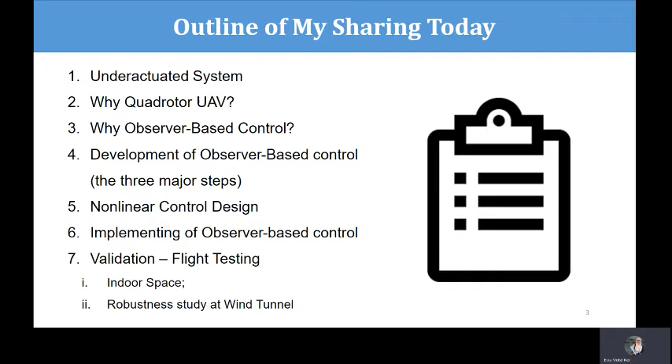Okay, so what is an under-actuated system? Under-actuated systems can be found in unmanned aerial vehicles, underwater vehicles, and also ground robotics. My focus is on the unmanned aerial vehicle, or UAV. In general, there are 2 types of flight: VTOL, which is vertical takeoff and landing, and fixed wing. In VTOL, we have, for example, the helicopter, ducted fan, and quadrotor.

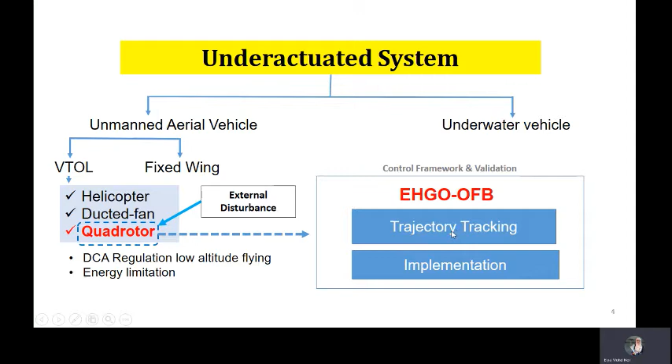In my study, I focus mainly on the quadrotor, because it is a good example of an under-actuated system and is of interest in the control community nowadays. The control framework and validation I'm proposing for the quadrotor is EHGO-OFB, meaning extended high gain observer with output feedback control, mainly focusing on trajectory tracking of the quadrotor during flight.

So why quadrotor UAV? There are 3 reasons. The first is its under-actuation property, which is of strong interest in the control community. The opposite is fully actuated. Fully actuated means you have one control input to control one output variable. But for under-actuated, you have a small number of control inputs to control a large number of output variables, so the control is challenging.

Apart from that, the potential application of quadrotor UAVs is very wide, for example search and rescue missions, remote sensing, construction, infrastructure inspection, and real-time road traffic monitoring. It has strong potential to replace humans in these missions, to be the first eyes for humans before sending them to do any job there.

But the challenge for the quadrotor UAV, or any UAV, is that it is small. It has a very limited payload, and it also has energy limitation, which means it can only fly for a certain time. The flight time is limited.

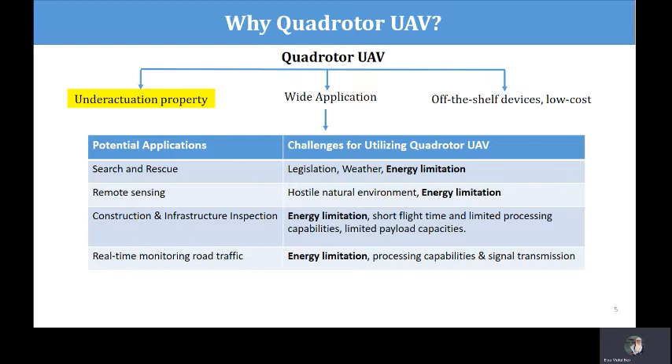So these are the challenges that I'm interested in and address in my research. Apart from that, quadrotor UAVs nowadays are available off the shelf. They can be assembled; we have them through commercially available devices. We can buy, assemble, and then set up whatever missions we want. There are so many things available off the shelf and it's low cost. So this is why I embarked on the quadrotor UAV study.

So why observer-based control for quadrotors? For a quadrotor UAV, as you see here, it flies. It is very small, and it needs to add monitoring sensors, whatever things help assist the human to check, evaluate, and monitor some areas, for example. But the payload for the quadrotor UAV is very limited. The more sensors you add to it, the more battery it will consume, and hence you're going to have a smaller flight time.

To have good control, we need all kinds of sensors. For example, to control the quadrotor in this mission, we may need position sensors, velocity sensors, so we can control the velocities and the positions, and also acceleration sensors. But in real practical applications of quadrotors, it is quite impossible to install all the velocity and acceleration sensors mainly to cater to the control algorithm. So this is why observer-based control comes in.

Observer-based control means that we utilize the existing sensors, for example, position sensors, and we estimate the position, the velocities, and also the acceleration, so that we are able to use the control algorithms to assist the quadrotor's trajectory tracking during flight. This is one example of a quadrotor flying over the open sea. It will consume a lot of energy to overcome the wind. So in quadrotor design we need something small and compact, and we try to find an embedded control algorithm that gives a smaller control effort.

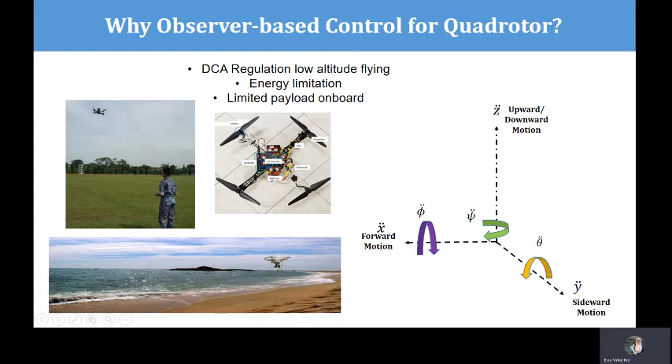So a little bit about the block diagram of the quadrotor. This block diagram focuses only on the under-actuated part of the quadrotor. The under-actuated part is actually in the forward and sideward motion. Here we see the control law and the actuators, which produce 4 signals: the thrust T, to lift up, take off, and land, and then tau roll, pitch, and yaw to separately control the tilting of each axis, the tilting in X, Y, and Z. So this is fully actuated.

This one is fully actuated, but under-actuation comes in because to move the quadrotor forward or sideward, we need to tell it to tilt the angle, and when it's tilted, it can move to the position we want. So the challenge in the under-actuated part is that to control position X and Y, the control torque has to tilt this angle, which then moves the other subsystem, the X and Y motion subsystem. So this is the control law that we are looking at.

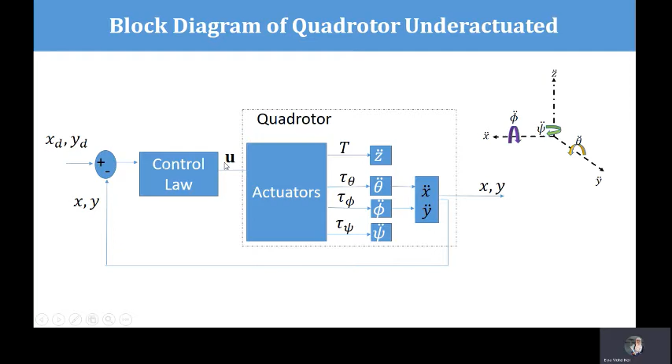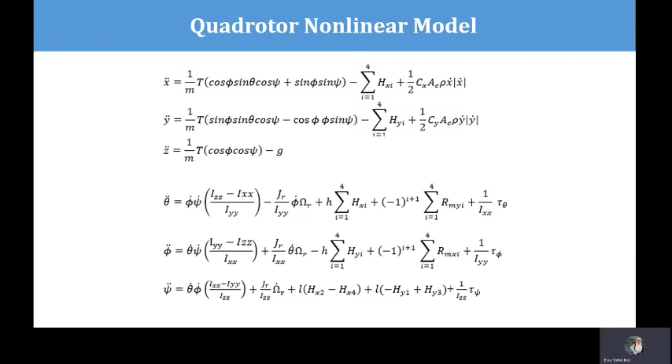So a little bit about the quadrotor nonlinear model. A quadrotor has 6 degrees of freedom, and this is the model. There's lots of literature where you can find the model. For example, I chose Bouabdallah, and there are others, for example from Italy, who have their models. Bouabdallah has a very simple model that was developed in 2004. So this is an example of a quadrotor nonlinear model.

Now we come to the main area here, which is the development of observer-based control for the quadrotor under-actuated system. In the development of this observer-based control, I would like to share that there are 3 main parts.

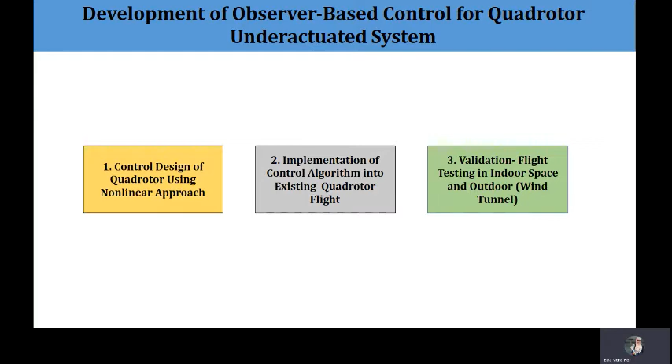So the first one is on the control design of quadrotor, which is using a nonlinear approach, the second is on implementing the control design into an existing quadrotor flight, and the third is on validating the control algorithm, which is flight testing in indoor space and outdoor. Okay, so let's go to the control design first.

So in the control design of quadrotor using a nonlinear approach, I would like to classify it into 3 major parts. The first one is we need to transform the quadrotor nonlinear model into under-actuated cascade normal form. So this is the under-actuated cascade normal form, where it has 2 subsystems, subsystem 1 and subsystem 2, which is cascaded.

It's cascaded, where the X4 here, the angular X4 here, will also be affecting subsystem 1, if you see S1 and S2. And also the control input is only at U here, which is at subsystem 2. Okay, so this is a general under-actuated cascade normal form.

So we look at this cascade normal form, and we look at the quadrotor, and we see how to map the variables that are related to each of these. So here, the input U is the torque at theta, the one we use to tilt the quadrotor to move forward, and also the torque at the roll, which we use to tilt the quadrotor to move sideward. That will be the control input U here.

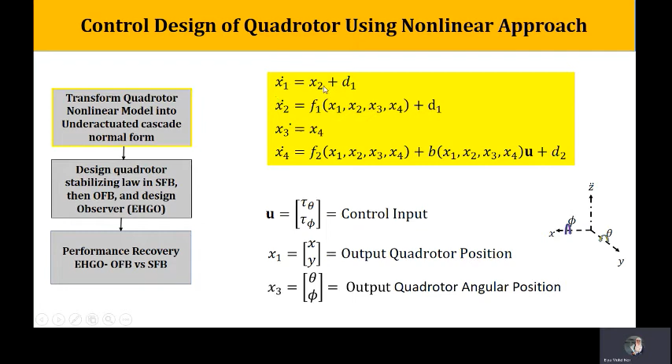Okay. So next is designing the quadrotor stabilizing law in state feedback, then output feedback, and designing the observer, which in my work I did using a extended high gain observer. So in the state feedback control, this is the control input.

Now, in state feedback control, there are so many nonlinear control approaches that we can use. For the state feedback design, there is backstepping, sliding mode control, and we can find them in the nonlinear control books authored by Professor Khalil. He has all the techniques.

But state feedback design is to develop the control algorithm, which is the theorem of the control. In order to implement the control, there are many areas that we need to look at. For example, if we have state feedback control, it means that all the variables x1, x2, x3, x4 are needed in the control algorithm. But in practical applications, for example a quadrotor, we may have limited sensors. We may only have sensors for x1 and x3, but x2 and x4 we don't have, right?

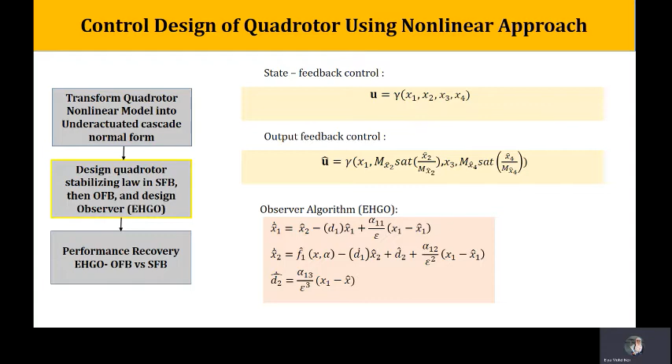So the last part of the control design framework is performance recovery of EHGO output feedback versus state feedback. In this part, if you are working on the development of the theory, for example designing the control algorithm in state feedback, you may need to do some proof of theorem. So here we are comparing performance recovery: how close our output feedback control algorithm is to the state feedback.

For example, for state 1, this is one example of a state response, where the position moves from 2 and is supposed to go to 0. This is the state feedback algorithm, assuming that our quadrotor has all the sensors needed by the control algorithm. This is the kind of response that we get, which is a small overshoot and a faster response.

But when we use output feedback, when we estimate certain sensors, this is the kind of output response that we get. As you can see here, in EHGO output feedback, the main parameter that we need to tune is the epsilon here.

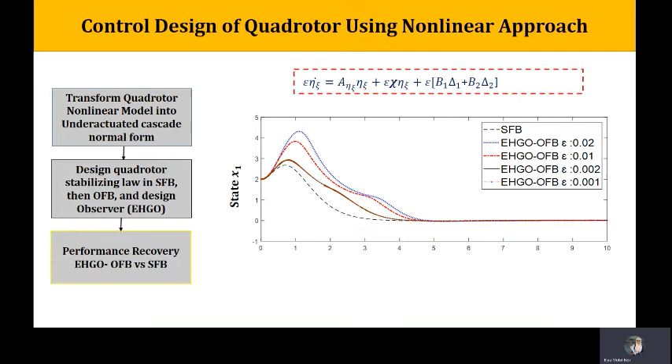So you can see that as the epsilon is reducing, you will get a much closer response, closer to the state feedback response. So this is one step in how we validate our output feedback control against the state feedback control. So next is on the implementation of the control algorithm into existing Quadrotor flights.

So prior to implementation, we need to understand the Quadrotor actuators. As you see here, the Quadrotor has 4 rotors: 1, 2, 3, 4. And this is the forward motion, which is in the x-axis, and this is the speed of the rotors in the sideward motion, which is the y-axis. So this is the algorithm.

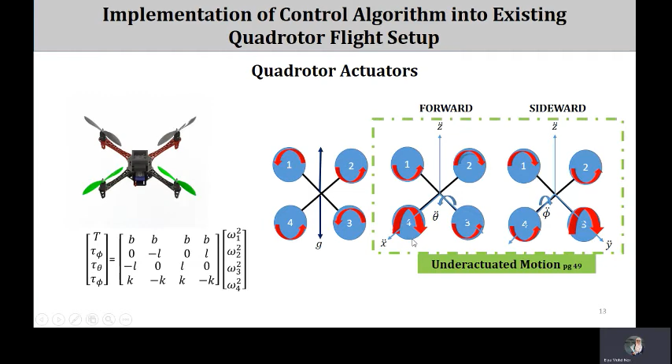Okay, usually the Quadrotors have built-in how we want to move it forward and sideways. So I'm only taking care of this one, the top that is moving forward, and then the top that is moving sideward.

This is the Indoor Satellite and Space System Lab of the Aerospace Department. This is available in UPM. So overall, the existing Quadrotor setup consists of an OptiTrack motion tracking system here, and at the ground control, it has a PC and XBee, which wirelessly communicates with the Quadrotor. And then the Quadrotor will be flying in the indoor space.

So in my work, I use the DJI 450 platform, which weighs 1.2 kg, the flight controller is the 3DR Pixhawk, and the battery is a LiPo battery, which is able to hover for 15 minutes. In this setup, the OptiTrack is measuring the position and attitude of the Quadrotor during flight. If you can see here, the OptiTrack up here is always continuously tracking the position and attitude, and then it gives the signal, which is Y1 here, which has all the positions and attitude of the Quadrotor.

It gives the signal to the ground PC station, and the ground PC station will compute the signals. Okay, so the output feedback control is at the ground PC station. It will take the signals and compute the output feedback control, and the control signals will be sent through XBee wirelessly to the Quadrotor.

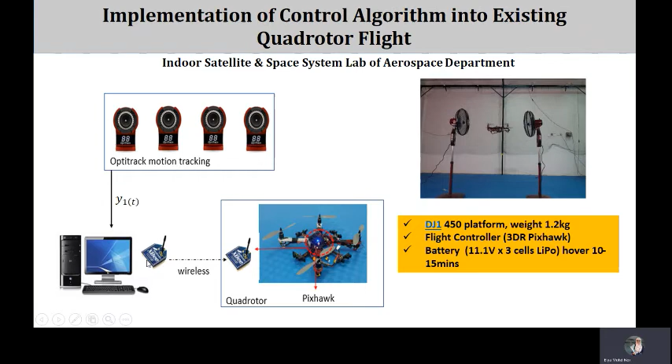So this is the block diagram of the EHGO in discrete form. Okay, so the EHGO is transformed into discrete form here, with Q1, Q2, Q3, and it has some gains here, at the end, K1, K2, K3, the gains that we need to tune to make sure that the EHGO is able to estimate the variables that we need. Okay, so there are other parameters, K2 and K3, that we need to tune.

So at the end, the observer-based control algorithm implemented into Quadrotor flight is like this, which has MU here, other constants here, and also a saturation of all these control signals here. Okay, so this is the output, the variables from the sensors, and this is the estimated variables from the EHGO. And it needs saturation because in the actual Quadrotor, the rotors have RPM limitations, for example 1500 to minus 1500.

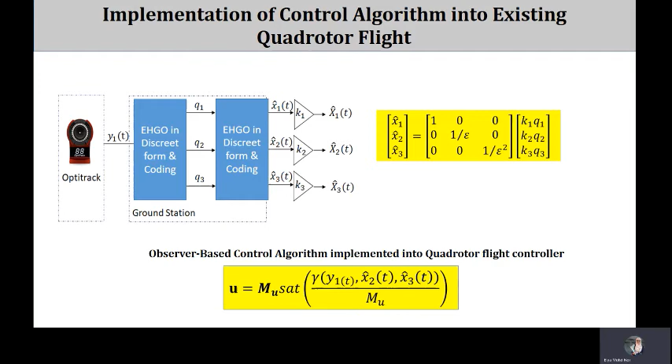But the challenge when we use observer-based control is that it may incur peaking during the start of the estimation. So we need to saturate, to cut off that peaking, so that's why the saturation comes in. So this is the block diagram of the actual flight setup.

So you have the Quadrotor motion forward and sideward, which gives the position X and Y. In the actual Quadrotor, the position X and Y will be measured by the OptiTrack, and then the OptiTrack will send the signal to the ground PC, and this is the ground PC station where the computations of this yellow part here, the discretized EHGO, and also the control part here are done.

And then the output, the control signal U here, will be transmitted wirelessly to the Pixhawk controller inside the Quadrotor, and the Pixhawk will send the signal to control the actuators, which are the 4 rotors, and the actuators will control the forward and sideward motions according to the algorithm.

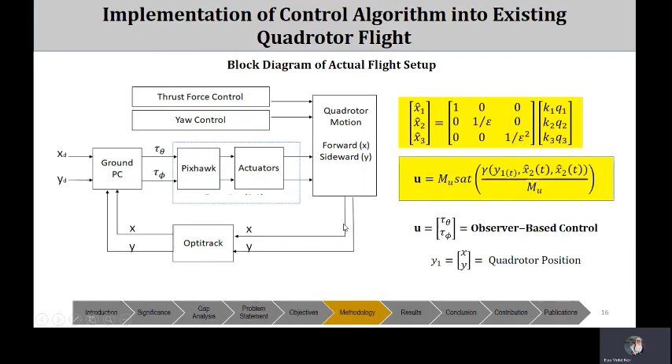Okay. So now we go to the last part, on the validations, flight testing. In my work, I did the validations in indoor space and also outdoor, which is at the wind tunnel, with trajectory tracking. So the performance specifications that I'm looking at are the settling time, which is how fast the Quadrotor responds to the commanded trajectory during transients.

The control effort is the magnitude of control effort by the controller to drive the Quadrotor to the commanded positions, and the position error is how close the Quadrotor is able to keep its position near the commanded trajectory during steady state.

It means how close it is during hovering. But we don't want the quadrotor hovering at a large radius, because if, for example, it's going to be used in small compact areas and it's hovering over a very large area, then it may knock the walls, and it will break the quadrotor, right?

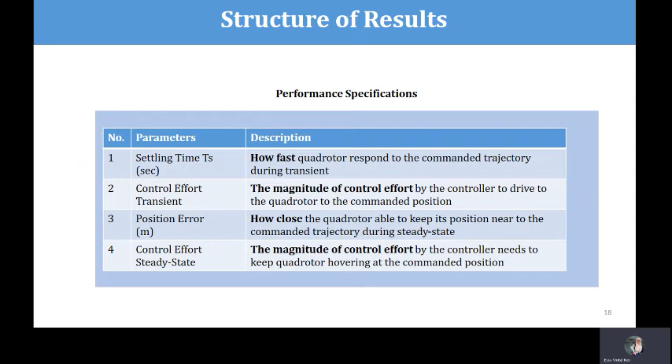And another last parameter is control effort steady state, which is the magnitude of control effort the controller needs to keep the quadrotor hovering at the commanded position. So this is also another criterion that I'm looking at. When it's hovering at steady state, in the air, how much control is consumed? Because, as we said, we are trying to find the control algorithm that gives a smaller control effort.

Okay, so these are the experiments conducted. I did two experiments: the first one is a point-to-point trajectory, and the second one is a square point trajectory. In the first one, point-to-point, we have the quadrotor here and a normal fan that blows, and the quadrotor is trying to move from position 0 to position 1.

In the square point trajectory, it moves autonomously from 0 to motion 1, motion 2, motion 3, and motion 4. We only control it through the ground station, and along the way it has a disturbance. The blue here is the wind disturbing the quadrotor.

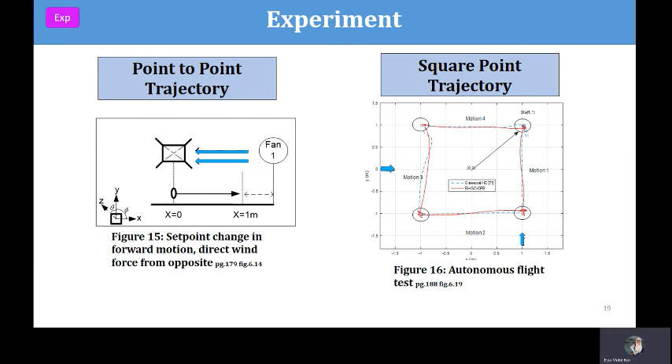So these are the results that we obtained. In this part, the result is using the observer-based control EHGO. As I mentioned, we only used a normal fan in the indoor space. If you can see here, the position error of the EHGO, the observer-based control that we added to the existing hierarchical flight controller, is compared with the existing flight control.

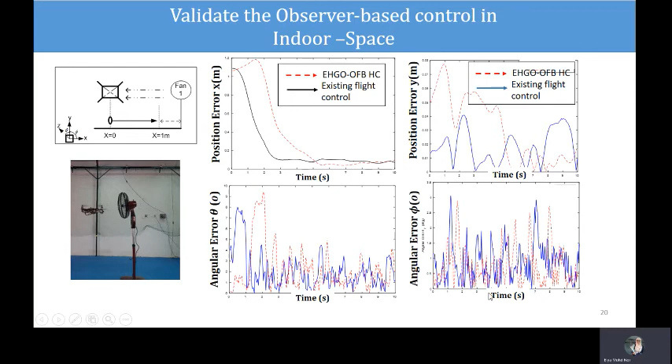You can see that the observer-based control gives slightly higher peaking at the initial stage, but at the end it gives quite a close output response. This is position error X and position error Y, and this is the angular error for comparison between the observer-based control and the existing flight control. This is the team working on it, myself and my students, in the indoor space.

Then, following that, alhamdulillah, I got the chance to study the robustness of the observer-based control in the outdoor space. I did the study in the wind tunnel in UPM, where the OptiTrack cameras setup is installed at the exhaust part of the wind tunnel. We used the existing setup, just transferred into the wind tunnel area, to study the robustness of the quadrotor observer-based control algorithm in a more challenging wind environment.

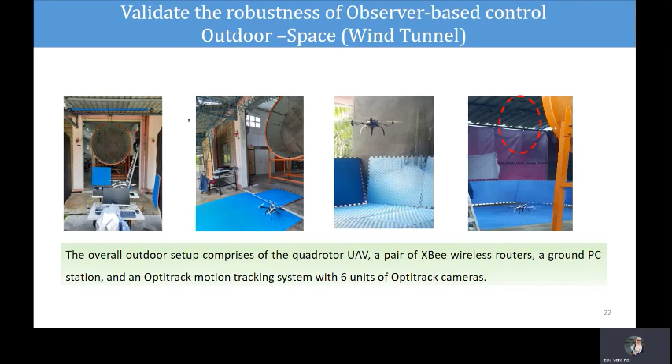So this is the layout setup in the outdoor space. As you can see here, this is one of the tests being performed. In this study we have a fixed flight procedure, fixed flight environment, and the quadrotor's trajectory tracking is fixed, and we performed several studies comparing the observer-based control using hierarchical EHGO with the existing flight controllers available.

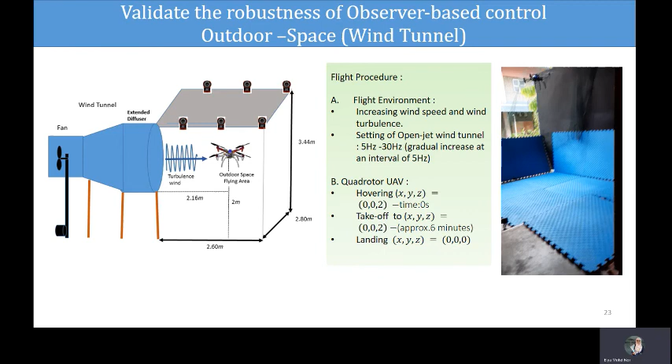The result is very interesting. Yes, it addressed the energy limitations. You may look at my publications. So this is the trajectory tracking, the three-dimensional flight obtained from the outdoor testing, obtained from the OptiTrack.

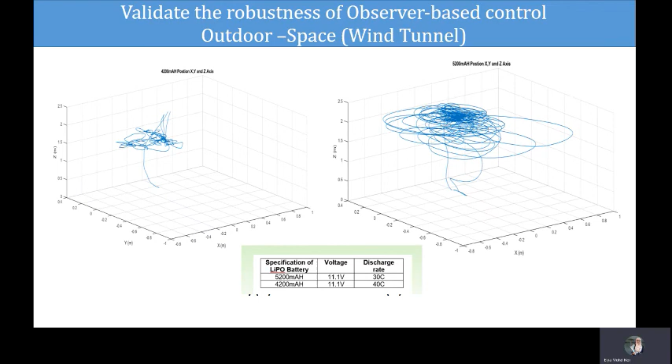If you can see here, the quadrotor takes off and hovers, and in another part it also takes off and hovers, but the radius is very large here, and in this one the radius is very small. What makes the difference is the type of batteries used in this flight testing. That means the batteries also play an important role in helping the control algorithm give much better performance. Okay, so I think that's all.

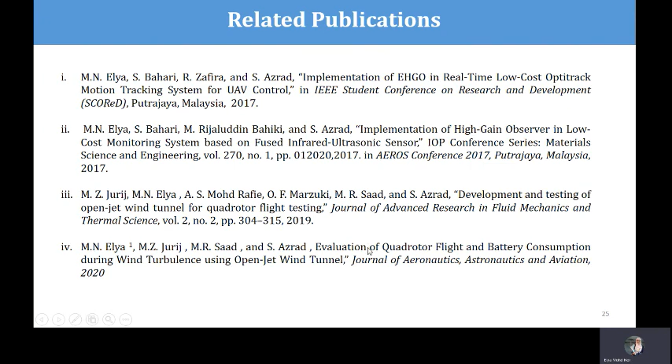These are my related publications that I would like to share. The first one details the implementation of EHGO in real time, and then the evaluation of the quadrotor flights at the open-jet wind tunnel.